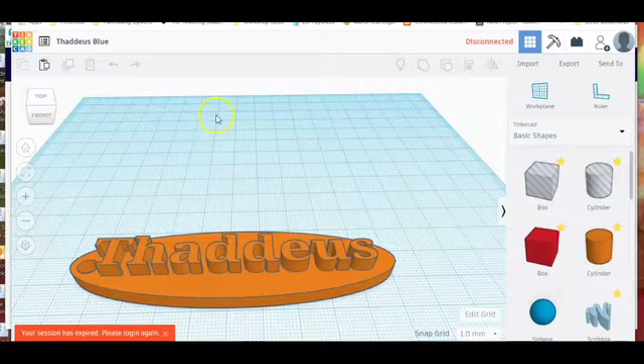Today we're going to take the designs we made last week on Tinkercad and go step by step through something called the slicing process, getting our prints ready to go, and then we're actually going to print an example keychain.

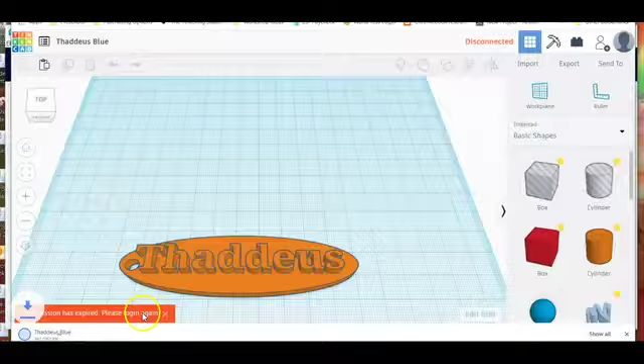Going back to last week, you see we have our design on Tinkercad, and we saved and exported it as an STL file. Today we're going to open up Cura, C-U-R-A, a free slicing software you can download onto a Windows, Mac, or Linux-based system.

The first thing we need to do is find our file, and now what we see is a model of what our print would look like. Like with Tinkercad, you can easily change your view by holding a right click.

The main thing we're doing with the slicing software is fine-tuning the settings of our design, and also changing our file into a specific set of instructions for our 3D printer to read. So using the software, we can adjust the placement of our design, the size of our design, and we can also rotate our design in different ways.

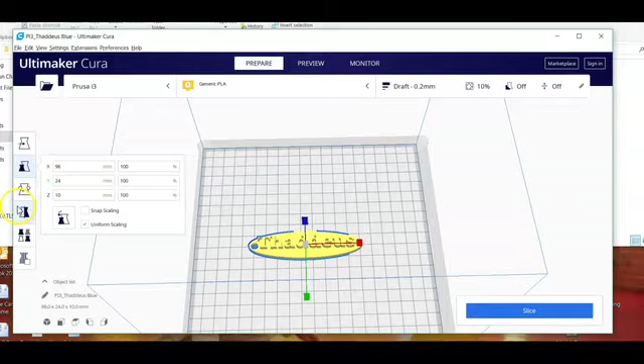Once you have your design the way you like it, it's time to check the printer settings, and you'll notice there are a lot of them. Most of these settings don't change, and here are a few important ones that do.

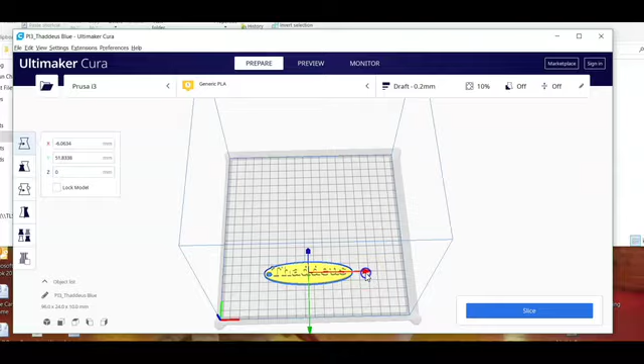Print temperature is one thing that can change from time to time depending on the material, or even sometimes the color of the material that you're using. For what we're using today, 215 degrees Celsius should work just fine, so we'll keep that the same. We also have to look at support settings fairly often, deciding with our design whether or not it needs supports. This one does not.

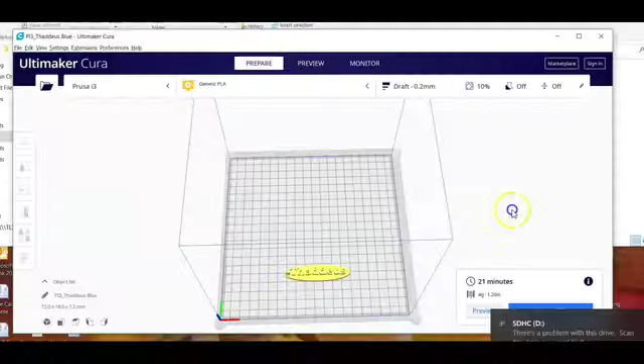So once I've checked my settings and made sure they're perfect, I have to find my micro SD card from my 3D printer and save the G-code on it. The G-code, of course, is the type of file that the slicing software creates. Then we put our micro SD card into the printer and our file is ready to go.

A few more things we have to do though before we actually start printing. We have to check the bed leveling. Some printers have automatic sensors for their bed leveling. These Monoprice Maker Selects that I have aren't quite that nice, so I have to manually bed level.

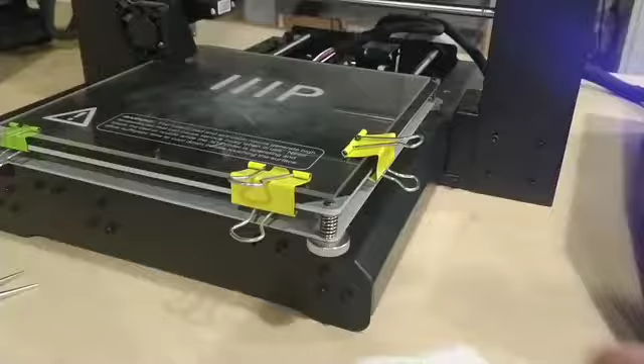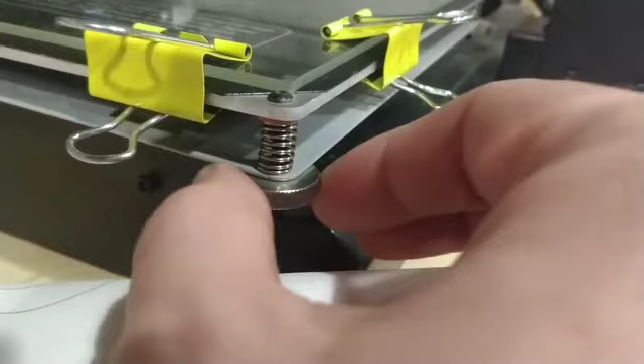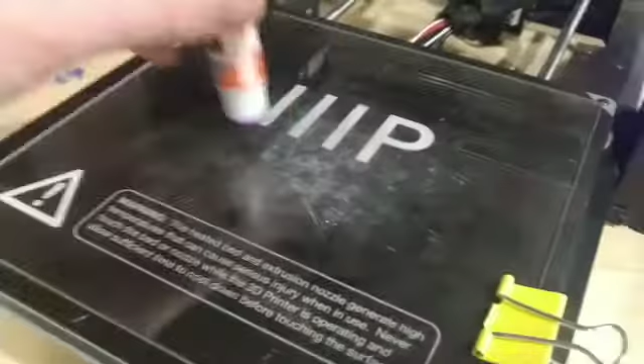I'm taking each corner here and adjusting it, making sure it's exactly 1/10 of a millimeter away from the bed — the nozzle of the printer, that is, 1/10 of a millimeter away from the bed. So checking that, going back and forth, measuring that thickness with a piece of paper, because that's about the thickness of a sheet of paper, 1/10 of a millimeter.

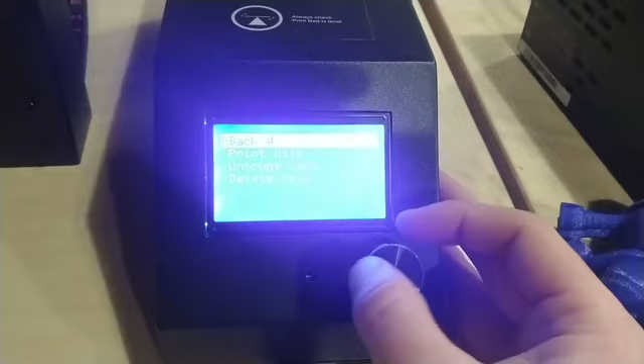Once we have that set up and it looks good on all corners, then we can put a little glue stick down — that's just regular Elmer's glue stick that I use — and then go through the interface of the 3D printer itself, find our file, and print.

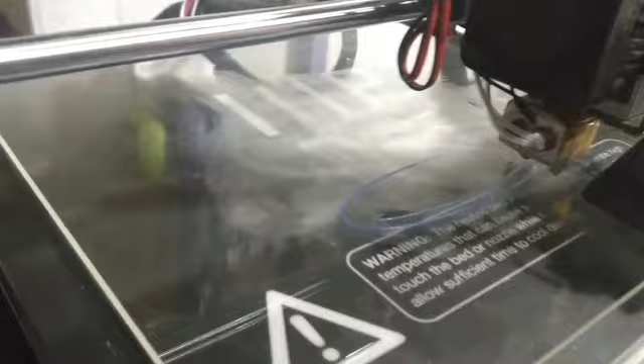You'll see that the 3D printer goes layer by layer, starting at the very bottom, so it'll just make an oval shape here at first, and then on top it will make the lettering. It's going 2/10 of a millimeter per layer there. So total print time is about 20 minutes, but we'll obviously speed things up here.

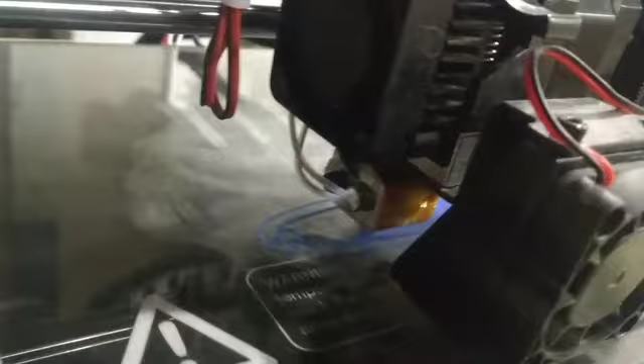And there you have it. Once your print is complete, we can just use a putty scraper to carefully scrape our print off, and our keychain is ready to go.